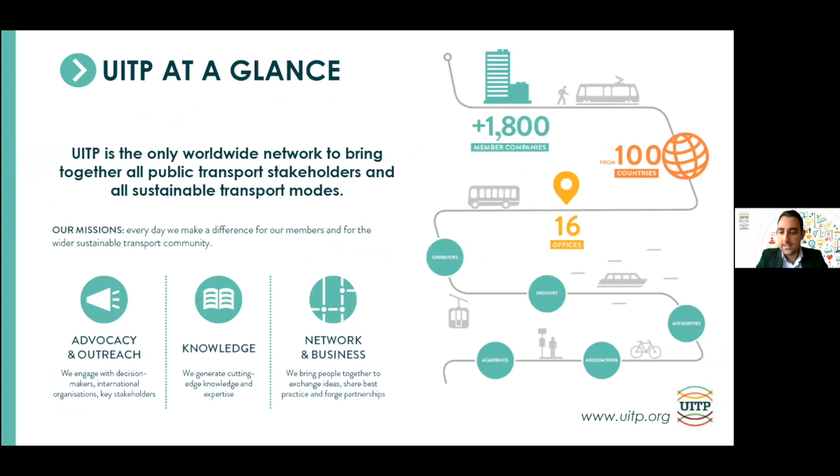So just to remind us of the general rationale behind clean bus deployment: we already see that the transition had already started in the past, with an idea to decrease the local CO2 emissions in our cities.

But today we have also a legislation push coming from the EU policy framework. It's a Clean Vehicles Directive that accelerates the deployment of clean and energy efficient city buses with mandatory procurement quotas. By saying mandatory procurement quotas, of course, the PTOs and PTAs will be obliged to deploy a number of buses according to those categories. But at UITP, we feel that it's an opportunity rather to think our bus systems in the future and to reflect on the quota.

So accordingly, from August 2021 until December 2025, 45% of the newly procured buses should be clean, and half of it should be zero emission technologies. And this number will go up from January 2026 to December 2030 to 65% as clean fleets, and half of it should be zero emission, meaning 32.5%. So overall, it's a good push in almost all member states in achieving the clean fleet technologies, and some lower quotas apply in the remaining member states.

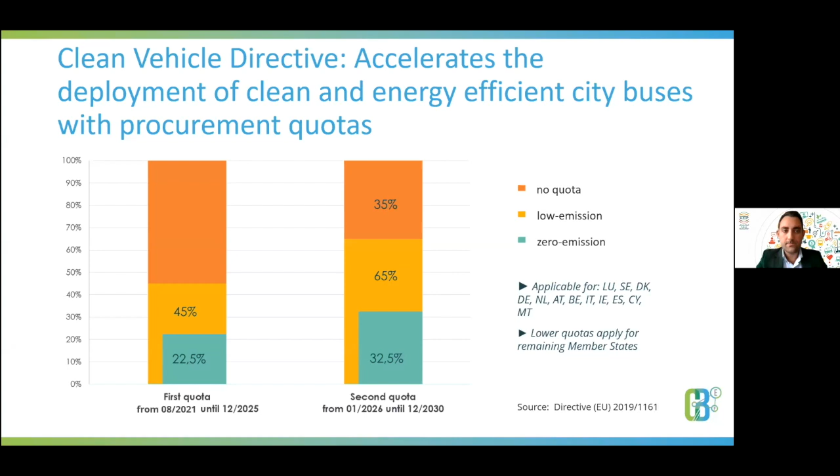Just to give you an overview about the technologies available in the market with a reference to the Clean Vehicles Directive, we have 5 main technologies: battery electric, plug-in hybrid, natural gas, fuel cell buses, and IMC trolley buses. But only 3 of them, battery electric, fuel cell, and IMC trolley buses, give us zero emission solutions.

And according to UITP data, we have around 200,000 city buses in European networks, and approximately 15,000 are replaced each year from diesel to zero emission or clean solutions. So here we see that the replacements are still from diesel, because diesel is still our benchmark, especially when it comes to autonomy and range. With a standard 12-meter city bus, you can have a range up to 700 kilometers. So it sets the goal for us.

When we zoom into the different parameters of comparison between technologies, the fuel cell is one of the most comparable zero emission bus technologies to diesel, because with a fuel cell bus you can go up to 350 kilometers with one refill, or more depending on operational conditions. It's a similar experience to a diesel bus, especially when it comes to refilling, because you can refill a fuel cell bus in between 5 to 10 minutes.

When it comes to charging and infrastructure investments, the CapEx cost initially is higher than other zero emission technologies, but fuel cells have a relatively competitive advantage because with one hydrogen refueling structure in place, you can accommodate larger fuel cell bus fleets according to your needs. When it comes to impact on operation, as with other zero emission technologies, you need to rethink your bus adaptations, workshops, and training of bus drivers. And when it comes to impact on the urban landscape, it's relatively low, because you can place the hydrogen refueling infrastructure strategically according to your city needs.

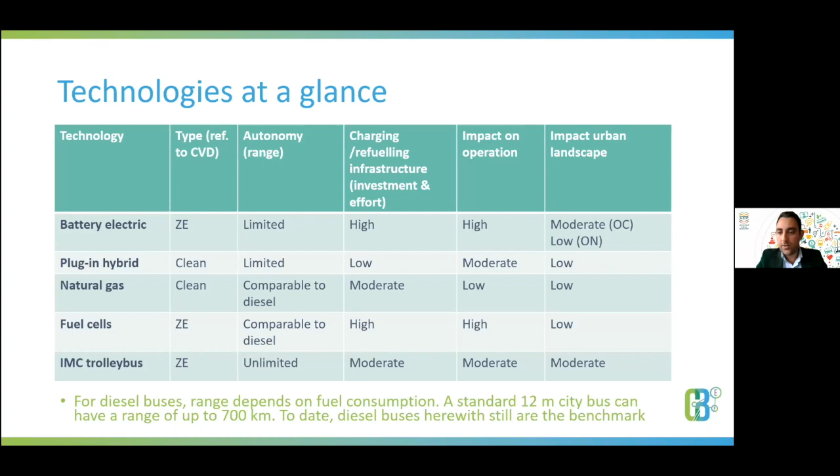So while we are talking about the technologies, I would like to present shortly the industry view on clean bus technology penetration. This is a study done by UITP's industry committee back in 2017. It clearly shows us that the industry was confident at that time that diesel would be replaced by battery electric buses and fuel cell buses by 2030.

And when we look at the figures for 2030, as Ricardo said in the beginning, we see around 12% market share for fuel cell buses, whereas it's around 45% for battery electric buses, 18% for CNG biogas, and around 16% for plug-in hybrid. So this gives us a flavor of the key trends today and in the future.

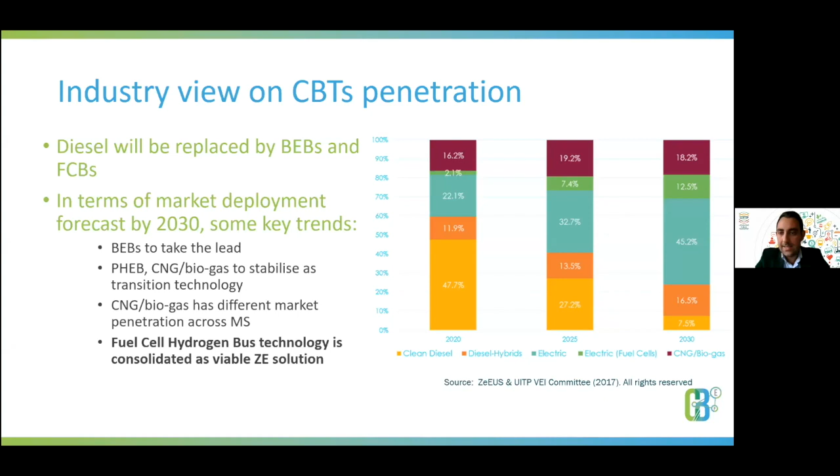And we see that battery electric buses are currently taking the lead in this transition. We know that plug-in hybrid and CNG are stabilized, as you see in the figures, over time, so we see those as transition technologies. We also know that CNG and biogas have different market penetration across different member states. But most importantly for today's webinar, fuel cell hydrogen bus technology is consolidated as a viable zero emission solution.

While this transition is happening, we have the Clean Bus Europe platform. It brings the network of stakeholders together to facilitate knowledge exchange around zero emission bus technologies and other clean solutions. On one side we have PTOs, PTAs, city authorities, and industries, and on the other side funding and financing institutions and other associations that are members of the platform.

We have a twinning approach. Basically, we have host experience cities in some technologies and learning cities in other technologies, and we match those cities so they can learn from each other.

And for example, we have Amsterdam and Eindhoven as host cities represented by Transdev, a colleague today, and Dijon as a target city. And for example, Caetano Bus is an industry member. So we have a dedicated work plan to achieve this facilitation. We have knowledge and expertise exchange, technical support around key issues like tendering and operations, also matching supply and demand, meaning bringing PTOs and industries and funding institutions together.

So if you are interested to become a partner or become a member of the Clean Bus Europe platform, we invite you to check the website.

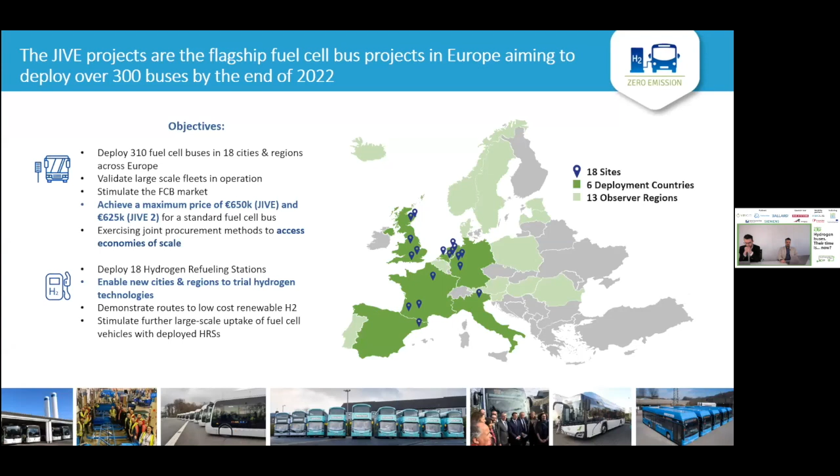To achieve these bus prices, we also exercise joint procurement methods, and I think it will be covered by Lionel extensively, to access the economies of scale. And in parallel, the projects also deploy the hydrogen refueling stations in those cities to really create the pipeline for the future of fuel cell deployments.

Just to give you the current status from the projects, to date, we have 17 cities and regions that placed bus orders from 6 different suppliers. So this totals the bus orders to 274 buses, and some of the buses are operational and creating performance data. So there's a long list of cities. You will hear it shortly from Bolzano. I would like to point out mainly the key idea of bus deployment. So you will see the bus numbers ranging from 5 to 50. So this gives you the idea about the scale in JIVE projects. And typically, the cities are deploying around 10-20 buses, and we know Bolzano is 12.

In terms of bus suppliers, now we see that the market is stimulated, and we have more diversified offers by 6 suppliers. And in terms of type of the hydrogen, we see that most of the cities get their hydrogen through green hydrogen electrolysis method.

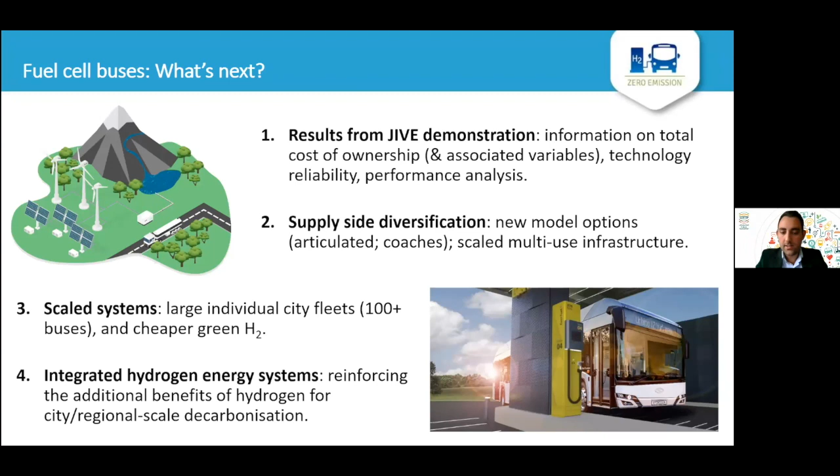So what's next from JIVE point of view, also about the fuel cell bus agenda in Europe? Definitely we need more JIVE demonstration data coming up, also the comparisons and the idea around TCO, the performance analysis of the buses. We also need the supply side diversification if we want to increase the share of fuel cell buses, as Ricardo was saying, maybe to articulated buses or intercity coaches, and also to study the scaled multi-use infrastructure effect. This will also help us to achieve a scaled system, meaning fleets with more than 100 buses, also to access cheaper hydrogen solutions. And therefore, an overall idea by 2030 is to assess and study the integrated hydrogen energy systems, meaning that more cities and regions are creating the framework for hydrogen ecosystems and economies.

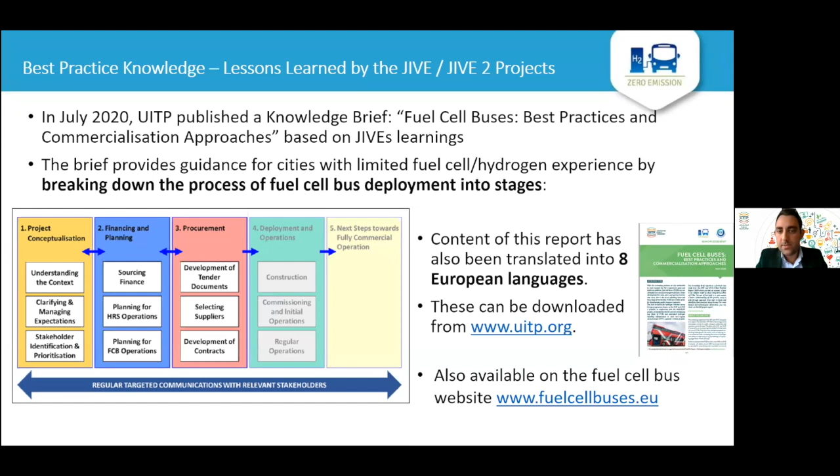I would like to end up with the key resource at UITP, lessons learned by the JIVE and JIVE2 projects. We put together a knowledge brief in July 2020, where you will find a key storyline, do's and don'ts of deploying fuel cell buses gained through JIVE cities. So we touched upon the project conceptualization, meaning the setting up of the project, to financing and planning and procurement. So also this brief is available in 8 European languages and can be downloaded from the UITP website or fuelcellbuses.eu, which is the official website of the JIVE and JIVE2 projects.

So all in all, this was my short introduction. I think that the fuel cell bus technology is consolidating and also technologically proven with the JIVE projects and other demonstration projects. For future scale up, we need best practice knowledge exchange, definitely. And for this, I think we are in the right hands today with a panel of speakers specialized in the market and also operating fuel cell buses.

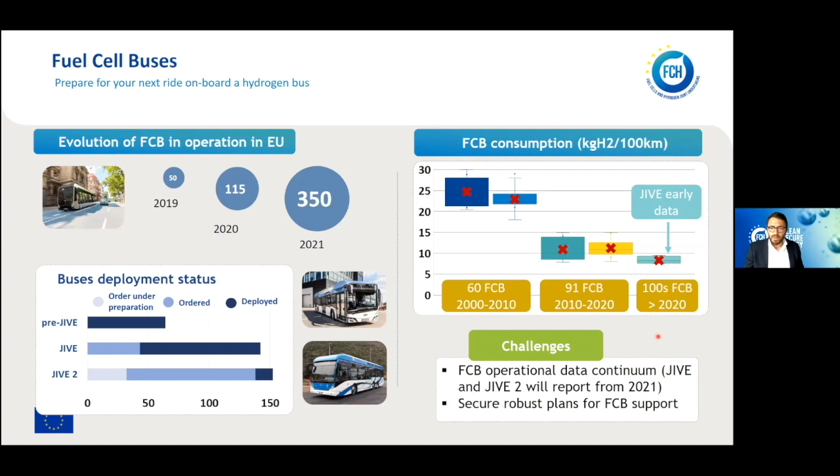And the first preliminary results from the JIVE project show roughly 6.5 up to 9.5 kilograms per 100 kilometers. These figures need to be developed and verified along the operation of the buses from JIVE and JIVE 2, but it shows you that the technology is progressing. And what I would like to say next is that people sometimes talk about hydrogen buses as being prototypes. There are no prototypes. More than 15 million kilometers have been driven using hydrogen buses within FCH 2 JU projects.

Elsewhere in the world outside the FCH JU, millions of kilometers have been driven. For example, Ballard, a major fuel cell supplier, announced a few days ago they have achieved 100 million kilometers on their heavy-duty vehicles, be they trucks or buses. No prototype, more than 35,000 hours of lifetime has been reached by the fuel cell. That was in London for the buses and the CHIC project.

The price target of 625,000 euros per standard bus has been met, and we have even seen offers quite below that, provided you order a fleet of buses, and that will be met.

I don't have updated figures for the new buses under JIVE and JIVE2, but availability has increased quite a lot in recent months due to easier access to spare parts, dedicated maintenance pits at the bus depots, and presence of fuel cell bus OEM staff on site at the bus depot.

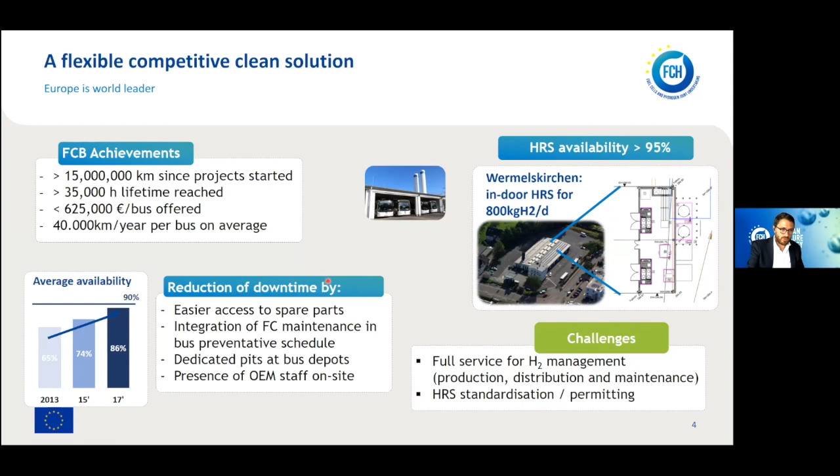Too often, in my feeling, we see local perception issues towards the construction of HRSs that take some time to be resolved. So we are working on making this faster for the benefit of everybody.

Now, if as a PTO or PTA you would like to order fuel cell buses, the catalog is quite vast. There are quite a number of OEMs that have announced they have models of hydrogen buses available for you. They come in different lengths and sizes, double-decker, single-decker, 18 meters, tram bus in the case of Van Hool for Pau, for example.

10 meters long bus in the case of Caetano. So all these European OEMs are active in the sector. And of course, there are non-European OEMs that are as well active. Won't talk so much about them.

The FCH has not only been supporting projects, providing funds for the acquisition of the buses, their operation, and the same for the infrastructure, but we looked at a long-term strategy, and we did two studies about fuel cell bus commercialization. One in 2012 that has shown that if we could put by the end of 2020...

...something like 300 to 400 hydrogen buses in the European market, then the OEMs, Van Hool and so on, would have sufficient scale to have manufacturing lines dedicated to this type of bus. With JIVE and JIVE2, we consider the 300, 400 buses are there, and therefore the market will expand.

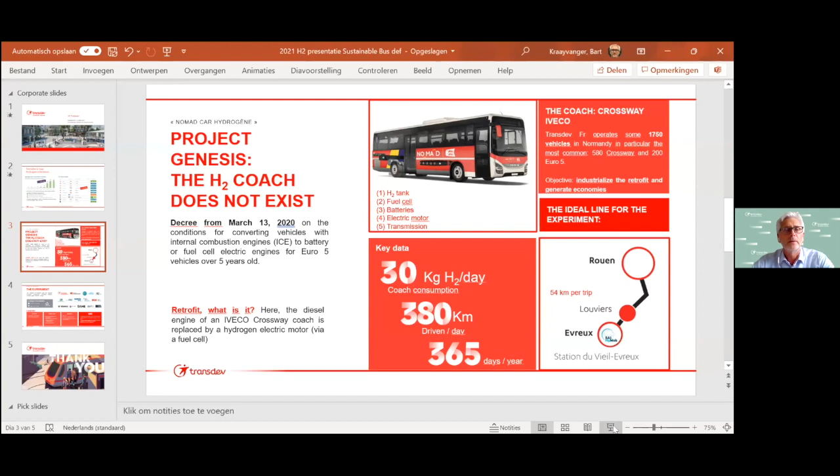Sorry if I interrupt you, I don't see the slide. I don't know if you were sharing them or not. Oh, didn't you see it? Sorry, then. No worries. You see them now? Okay, thank you. Sorry, then you missed my first slide. Yeah, but your speech was quite clear. Yeah, this was the first slide. Okay, this is the second.

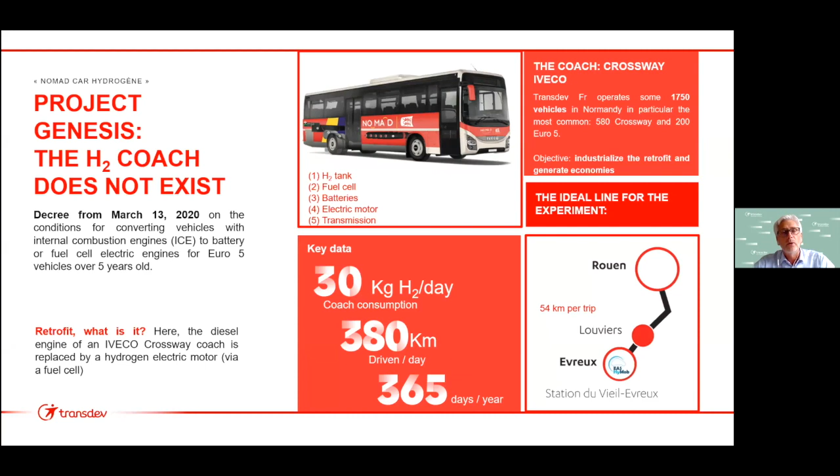Here you see the slide of the project in Rouen, and it's the perfect operation road to test the hydrogen solution, because it's a line between Rouen and Évreux, which covers 380 kilometers per day, 365 days a year, with a very high average speed. So these are the ideal conditions to test hydrogen buses.

After an intense period of preparation with all the parties mentioned on this slide, we will have the first dry run with this bus in this quarter of 2021, and we will start operation with the retrofitted fuel cell bus in Q1 2022. So I think long distance lines with high average speed are the operations where hydrogen buses will be best placed, and that is also the future for hydrogen buses in the Netherlands, I think.

So this was my first answer to your question. Do we go to the next question immediately, or what do we do? We will make a second round in a moment, but thank you.

The topic of splitting competences between e-buses in the city and fuel cell buses out of the city is quite a common thing these days. Fuel cell bus projects started 10 years ago with a focus on city application. We see most attention now being focused on intercity, but not only this, there is also city application in certain areas. Going back from the Netherlands to Dijon in France, where buses are just a little piece of the puzzle of a wider commitment of the city for the creation of a hydrogen ecosystem, we have here Thomas Fontaine, managing director of Keolis Dijon. So Thomas, may you outline the reasons for this choice and the roadmap you have until 2030? Please.

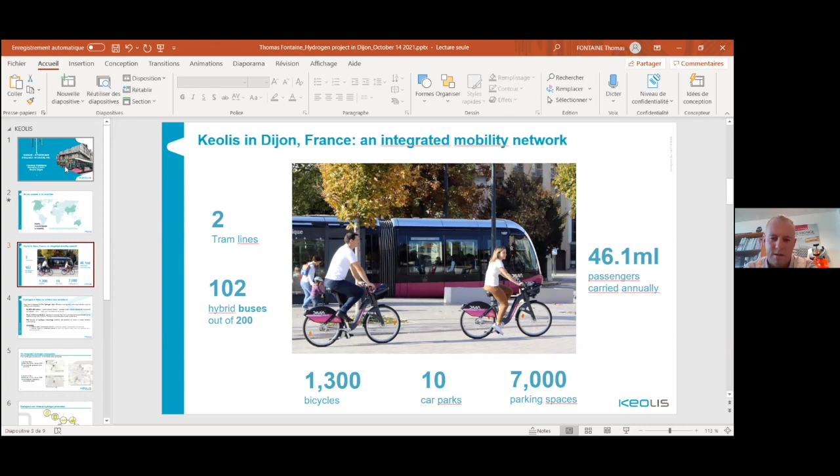If we go to the strategy regarding the hydrogen system in Dijon, maybe just a few words about why Dijon is developing this hydrogen ecosystem. Dijon wants to be in the next years the first hydrogen city in France and one of the first in Europe. In terms of fleet size, we speak about the conversion from hybrid and diesel buses to all hydrogen buses in the next 7-8 years, so we speak about 200 vehicles, and the aim is to save around 1,750 tons of CO2 per year, which is a really high level. The program already begins with hybrid buses and trams, but we are still within this plan at Keolis Dijon Mobilité to develop it further. The second part is to have a complete ecosystem, meaning we will work with integrated production, we speak about green hydrogen.

So all this hydrogen will be built with a local development, meaning that we'll use the concept of garbage to wheel. I'll explain that later with a schema, meaning that we'll use the waste system in the dedicated plant to build green electricity, and after to build electrolyzation of hydrogen. In the meantime, we'll use a photovoltaic farm to have all this system with green hydrogen. It is really interesting because we will have the development of the hydrogen fleet, and the production will be green.

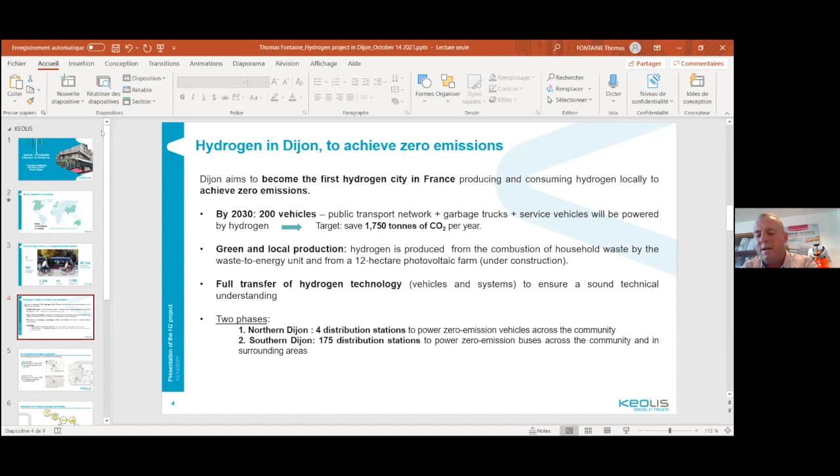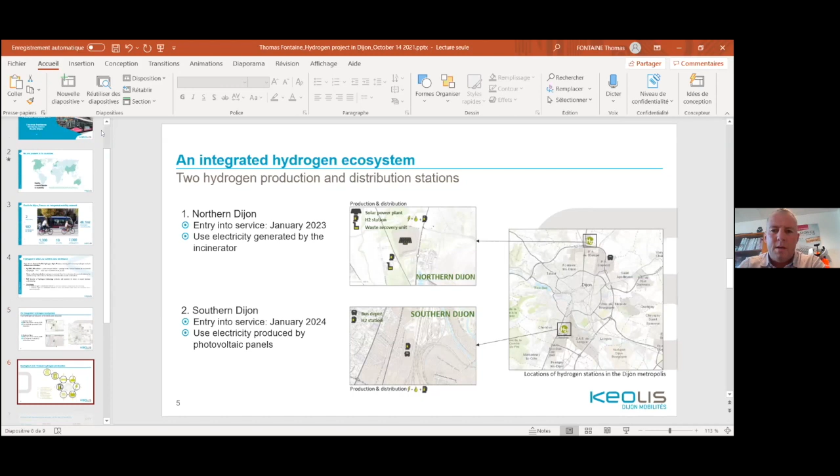Just going back to the way of production of the green hydrogen, as I was mentioning - it's really the process of garbage to wheel. It's a kind of circular system where you've got the waste system, then you produce the green electricity, and you supply energy to the garbage trucks and the buses.

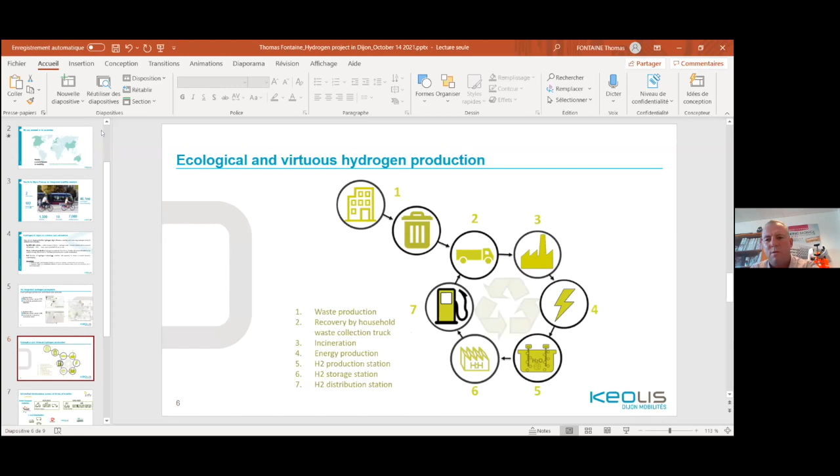After, we'll use photovoltaic too, and we are looking in the future to develop the fleet of buses to have other green sources of hydrogen in order to supply the system, meaning that we are working on approaches with biomass and green electricity too. It's really the capacity to go progressively and develop the system over the next 7 years, in order to always have this balance between the increase of the fleet and the capacity to have green hydrogen production.

Just to give you an approach about the fleet - first phase, starting now, 8 garbage trucks, 27 buses. We are almost concluding the bidding process in order to choose the manufacturer for the buses, working with experienced manufacturers. There has been really strong competition on that, which has been interesting, and we have seen different interesting technology, meaning there is maturity arriving on hydrogen buses, and that's really good news.

When we focus on the years between 2024 and 2026, the fleet of garbage trucks will increase with 14 more, and we'll have articulated buses, 18 meters, with 35 buses. Then after, the next phases will be for the rest, meaning 130 buses from 2026 to 2030. To be clear, it will be the replacement of the hybrid buses, which will be around 17 to 18 years old at that moment.

We are working on the project, and that's a key point of success in Dijon, with the management and partnership of Dijon Metropole, which is the city, and we are giving, as a major stakeholder, all the orientation. We work closely with Rougeot, which is building the electrolyzation station, and has a part called Rougeot Energy, handling all the engineering for the electrolyzer and the station.

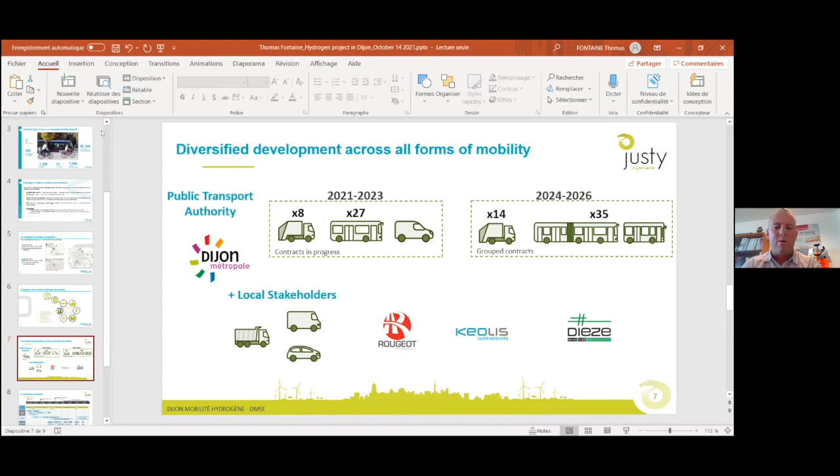Just to conclude and give you a global map and overview about the program: there are different things about the project life cycle. We are still at the end of the development phase and construction of the station, working on the supply of H2 for next year. It's a 20-year program for supply of H2, so we have time in front of us.

If we speak about development, what we are working on as innovation for all the buses is bus place supply, meaning we won't have a dedicated station at the entrance of the depot, but wherever each bus is parked, the hydrogen supply will be done during the night shift or during the time that will be developed for that. That's a new innovation we are working on.

Right now, the Dijon Metropole program has been launched for construction of the northern Dijon station, and the southern one is about to be launched too. Everything will be ready for the first buses end of 2022, and after for the second batch of buses in 2023. So it's really a pretty quick program we are developing, with this progressive development of the fleet.

And right now, just to conclude, in the meantime, if we speak about the bus fleet, we are about to conclude the contract. We are already working on the transfer of technology. I do insist on the work we are doing with all the universities and schools in order to make the training. Our team of drivers and maintenance are going into training right now. We are developing the training with the engineering school.

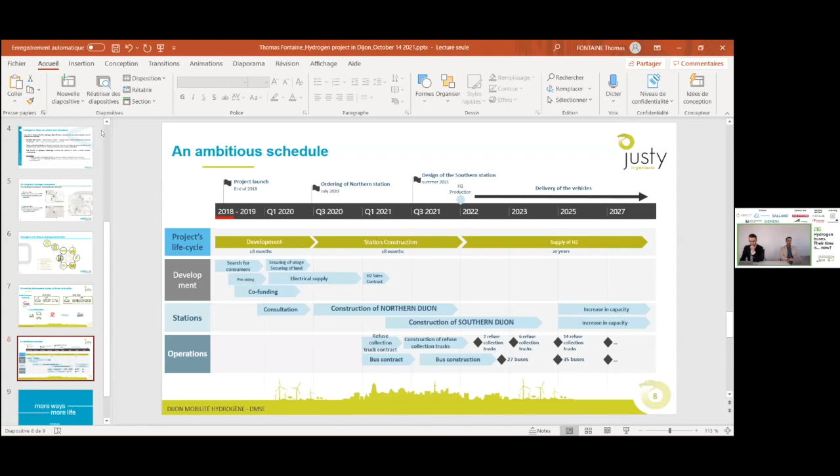Now we are glad to have with us Wolfgang Reitmeier from the VDV, the German Association of Public Transport Companies. Wolfgang, may you give us a picture of where Germany is standing in the field of hydrogen buses, and what are the expectations for the upcoming years? Also considering the highly ambitious German national strategy on hydrogen, please.

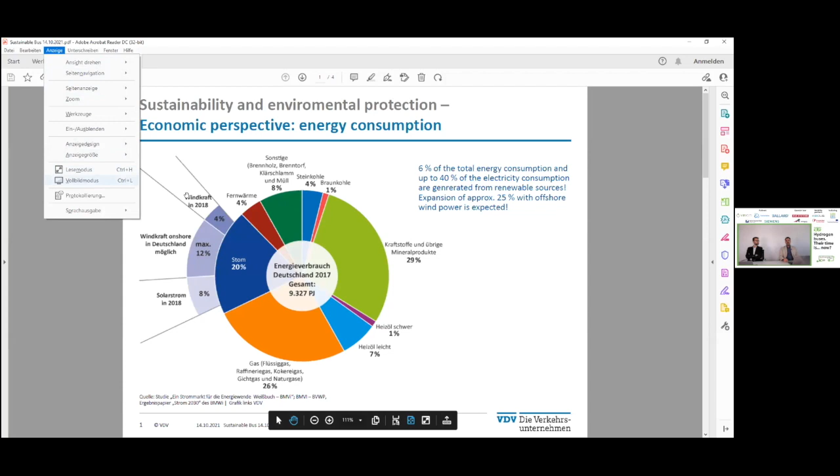Thank you, Ricardo, for the introduction and for the opportunity to show the German situation and the position of the VDV. In Germany, we are facing a great challenge. We are planning to switch off all gas and coal-fired power plants and also all our atomic power plants.

So that's why we must produce all the energy we need from renewable energies. In the first slide, you see the energy consumption of Germany. Most of the energy we need is made from oil and from gas, a little bit also from coal, and about 20% is electrical energy, with only 6% of the total energy consumption made from renewable resources. So that's why we must save every kind of energy to make electrical energy from it. So hydrogen would be a very expensive energy for us in Germany in the future.

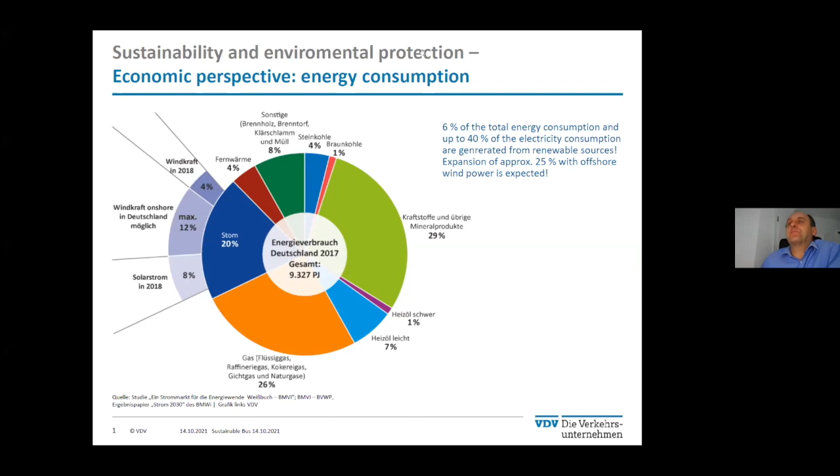So the efficiency of the whole system is very important for us. That's why we see the city bus with a battery drive as the right solution for ordinary cities. And for special purposes, we need hydrogen.

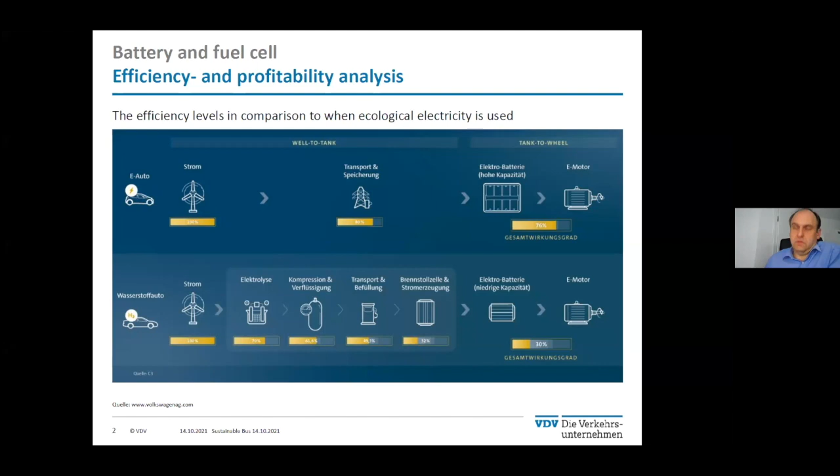For long ranges or also for very strong topographies, we will use hydrogen buses in our city. One more problem is that in Germany we don't have so many bus suppliers on the market. We only have Caetano, Van Hool, and Solaris available, and soon we will have EvoBus available, fuel cell buses from EvoBus, in Germany.

At the moment, we use around 1,000 electric buses in Germany and around 50 fuel cell buses, out of a total of around 40,000 city buses in Germany. So you see the share of fuel cell buses is very low at the moment. The availability of fuel buses is also a problem in Germany.

A lot of bus operators are very much interested in using fuel cell buses in their companies, but we also don't have much infrastructure for fuel cell buses.

So to conclude, environmental legislation requires a significant reduction in emissions by 2030. The hydrogen infrastructure will not be established until 2030 at the earliest. The national hydrogen strategy only provides for the use of green hydrogen obtained from renewable energy through electrolysis. It is very strict about using only green hydrogen for public transport and for all other hydrogen users in Germany.

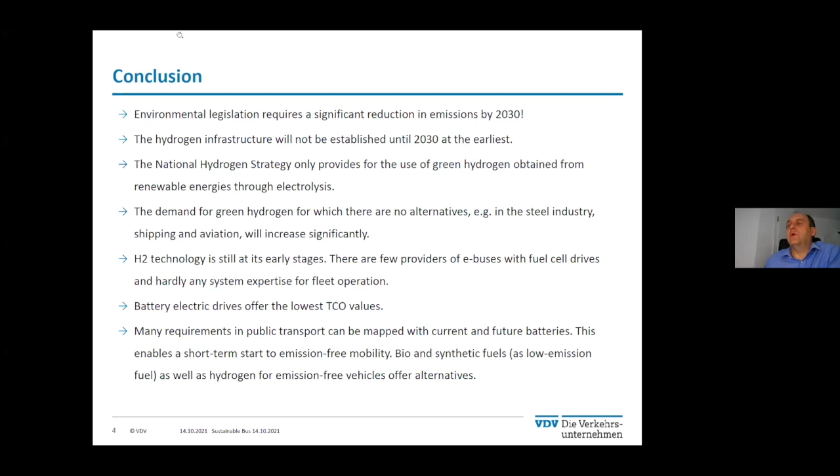Thank you, Wolfgang. A very clear message to OEMs, to manufacturers who are now listening. Also, the topic of energy efficiency will surely be addressed in the next contributions. You mentioned TCO, so battery electric and fuel cell buses will focus on TCO.

I'm now starting a second round, asking everyone to be very quick as many people still have to talk. Starting with Bart from Transdev. You have quite a long experience, mainly on e-buses, now also on fuel cell buses. So could you help us do a kind of comparison on a TCO basis between battery electric and fuel cell buses? Thank you.

Thank you, Ricardo. What we see from our experience in the Netherlands is that the total cost of operation of a diesel bus and a battery electric bus are coming very close to each other. But we also see that hydrogen is still much more expensive than the battery electric bus solution, and that's also why most hydrogen projects nowadays are subsidy-driven. What we see is that the total cost of operation of a hydrogen bus is up to 60% higher than that of a diesel bus.

But the difference we see is also getting smaller. We see a lot of developments in the market that will bring the total cost of operations closer together. The developments we see are, on one side, on the fuel cell: suppliers of fuel cells are developing fuel cells that will have a longer lifetime, so you won't have to replace the fuel cell during the lifetime of your bus anymore.

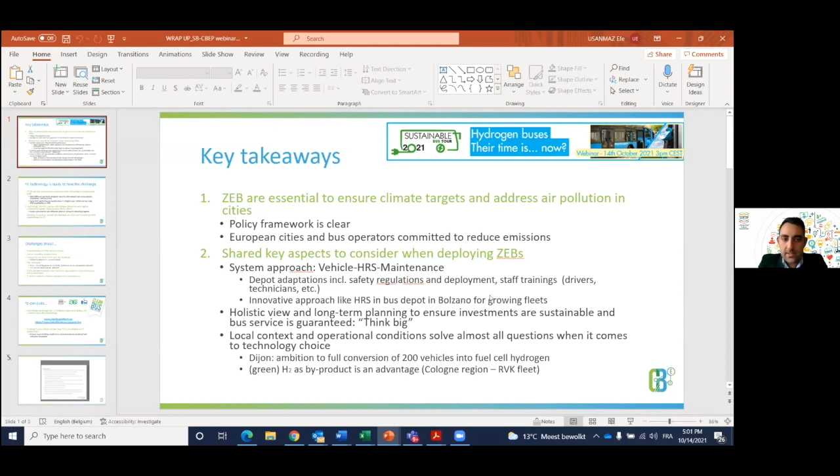So the key takeaways from my point of view are that zero emission buses are essential in the coming years to achieve our climate targets. We have the relevant policy framework for it, and European cities and bus operators are apparently committed to reducing emissions, therefore applying the fuel cell bus solution as well.

We've listened to operators and industries, so we have shared key aspects to consider when deploying zero emission buses, especially fuel cell buses. We need to think from the system point of view; as David was saying, we should focus not only on vehicles and HRSs, but also cover maintenance aspects. For this, we need to see the depot adaptations, including safety regulations, deployment, staff trainings, and so on. And like Bolzano, we can also come up with innovative approaches like HRSs in the bus depots, also to accommodate growing fleets.

Thinking big is important in the fuel cell sector, also to my experience. We have cities like Dijon, for example, putting together a fuel cell strategy, an ambition to fully convert 200 vehicles, as we heard from Thomas, into fuel cell hydrogen. And we also know that different hydrogen production methods and resources are key. Therefore, the local context and operational conditions are important to decide which way to go.

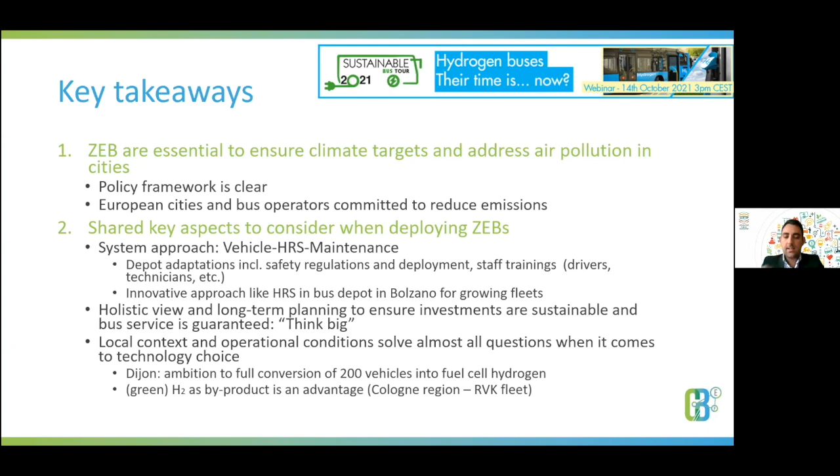Fuel cell technology will be there to take the challenge. As Lionel was saying, we are not talking about prototypes anymore; the technology is progressing very well. We've achieved the main KPIs in the JIVE projects, and it attests that the technology is mature now. Early JIVE performance results show 7 to 10 kilograms of hydrogen per 100 kilometers on the bus side. And we have, for example,

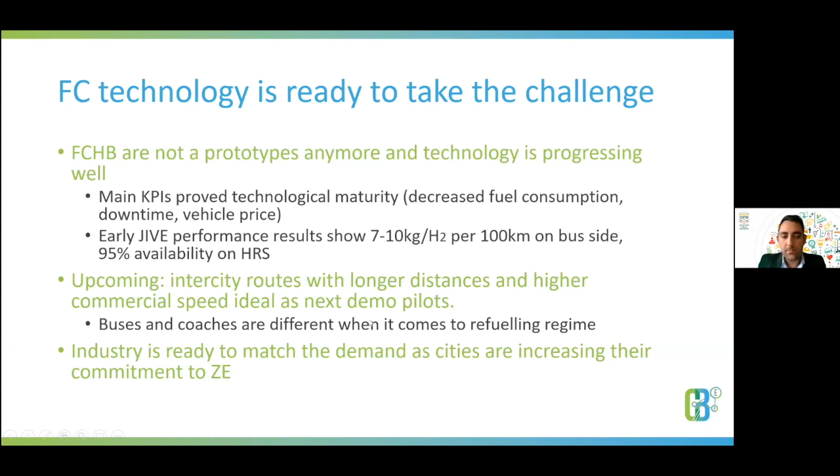95% availability on HRSs. We heard from our Transdev colleague that upcoming applications could be on intercity routes, and buses and coaches are different when it comes to the fueling regime, so this is something to take into account. We know that industry is ready to match the demand as cities are increasing their commitment to zero emission technologies. We do have some challenges ahead for all technologies, but specifically on fuel cell, we heard that standardization of HRSs and permitting are key for future uptake.

We heard from VDV that the lack of refueling infrastructure is somewhat challenging in Germany, so we should focus on this too. The energy mix and state of the grid are key to deciding the carbon footprint of hydrogen; green hydrogen or byproduct is very relevant. TCO, as mentioned by colleagues, is important, meaning the price of hydrogen should go down to around €5 per kilo to achieve cost parity with battery electric buses. And we heard that in 4 or 5 years it could be doable.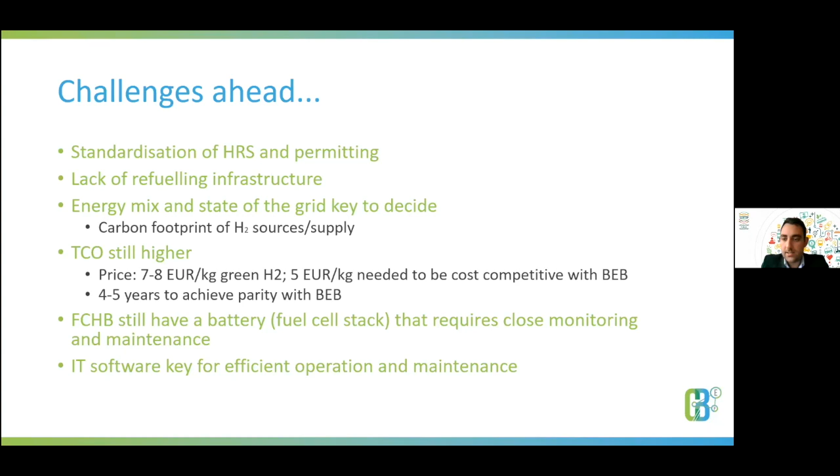We also know that a fuel cell bus still has a battery, so it requires close monitoring and maintenance as well. IT software, data loggers and so on are key for efficient operation and maintenance and to get the data right. So to conclude, we've been discussing for 2 hours and we have great knowledge about fuel cell buses, thanks to all panelists. It's key to continue this exchange, and we have the Clean Bus Europe platform to do so, and the JIVE projects. So we invite you to follow the projects and continue sharing.

And of course, as mentioned, it will be an interesting 5 years ahead to consolidate the fuel cell bus in the European market. For this, we need more funding models as well as cooperation among stakeholders like we have today. So I hope this gave a clear understanding of today's discussion. For me, it was very, very informative. So thanks to you all.

Thank you very much. You had very challenging duties, opening and closing the webinar, so once more, many thanks. I also take away a lot from the webinar. You mentioned 4 or 5 years to reach parity with battery electric buses. This is a figure we keep in mind, as TCO is absolutely crucial. We are on the way to a commercial application of fuel cell buses.